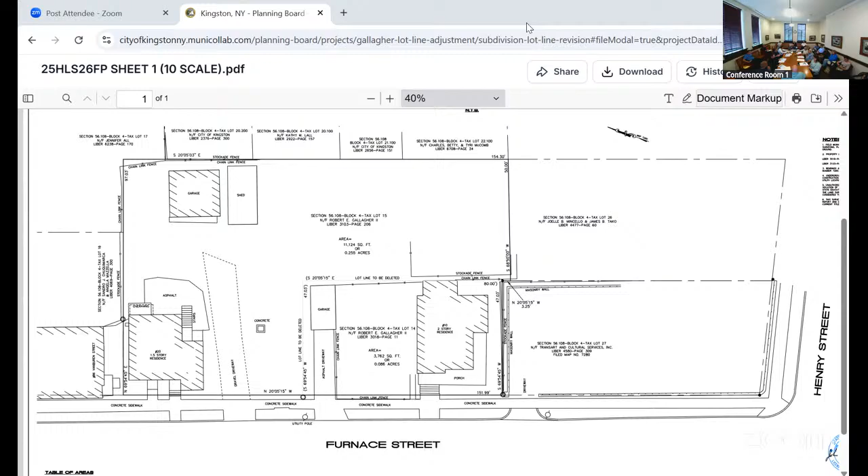All right, I made the motion on that one. Is there a second for that? Second by Vince Archer. All in favor? Aye. Opposed? Carried. All right.

You're out of here. All right, thank you, go run down the stairs. Thank you very much, good seeing you. It all worked out today. All right, for no reasons. Take care, Bob. Thank you.

Okay, item number 3 is 560 Albany Avenue, special permit renewal for operation of a light manufacturing welding business, section block and lot is 48.74-1-5.200, transect zone T4N-O, SEQRA determination, Ward 6. Triangle Fabrication LLC is the applicant, Five Star Realty Holding LLC is the owner. Anybody besides the owner or applicant wishing to speak on item number 3?

Is this just a public hearing for this one? It is, but this is the one that has not met all the conditions of the original approval, so I'd like to ask that the board put this one off until the end and we'll vote, to see if he shows. Okay, you good with that, board? Okay.

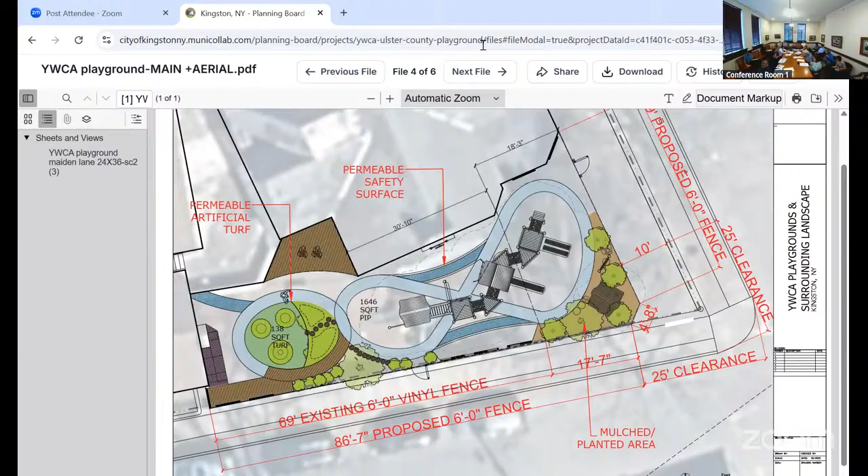Not going from there. 6 or 7? Did I say 6? It says 7 on this one. Yes, this is the one that I printed out. What was it? 6. Just in case you're missing something. I might be missing something. All right, that's 2, 3. But there's no 5 in there. It's on us, we're blaming her. All right. Let's move on. Okay, and the old business, right? Yeah, that's fine, I'll sign this first.

Thank you. Old business is item number 7, draft amendment to planning board approval resolution to address delayed installation of boulevard traffic signal. Section block and lot is 56.40-1-19.310, Transect Zone SD-MF Ward 3, SEQRA determination. Ulster County is the applicant, Golden Hill HDFC as nominee is the owner.

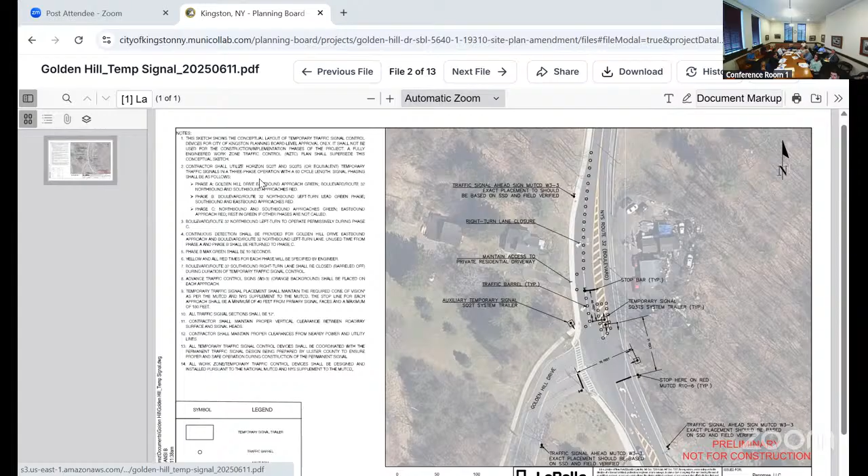There's a draft of a resolution in each of your folders that we will get to. Kyla is putting it up - you have a copy in your staff notes, but Kyla's going to put it on the screen. After last month's discussion, the applicants went back to LaBella Associates, and they provided this design layout for temporary traffic signals and other associated improvements, signage, and some lining that would also be installed. John Schultes reviewed this and they essentially agreed to this layout. He did have a couple of comments after his review. One is to simply remove the statement that it's a preliminary design off the plan before it becomes final.

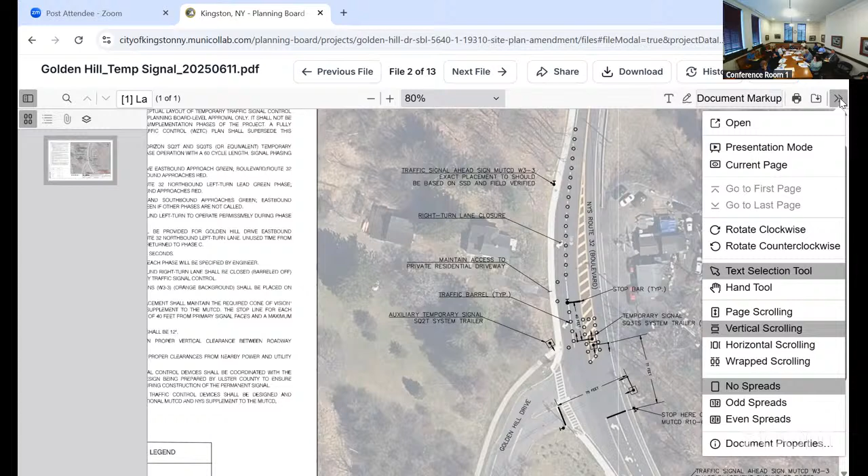And then his other major concern was how the operation and maintenance of these temporary signals will be achieved on a 24/7 basis. So we forwarded those comments along to both Dennis and Will, who are here tonight. I don't know if the board has any questions about how these will work.

Dennis, I know you and I had that discussion, and Will too. So you might want to just talk through how temporary signals will work as construction takes place, and then we can talk about timing later. So I'm going to turn it over to you guys.

So last time we came with, I would say, just a much more preliminary plan based on the vendor itself who was going to put these in place. Since then we got some feedback, and it took some time to forward this to our engineering team and have the traffic engineer put together a real conceptual design, which we were able to put in front of the city engineer for his feedback.

This is still a very conceptual plan that will be finalized into construction plans that the actual vendor itself will utilize to mobilize their equipment. And I've been assured that we will have 24/7 coverage.

These signals can be monitored and adjusted remotely. If there's an issue in the middle of the night and it needs adjusting quickly, they get those notifications immediately, and I can provide some explanation of exactly how that works at the meeting if that'd be helpful. They also have the ability to mobilize if an adjustment is needed on site, so we'll make sure those services are available in case there's ever any issue here. Did that answer your question?

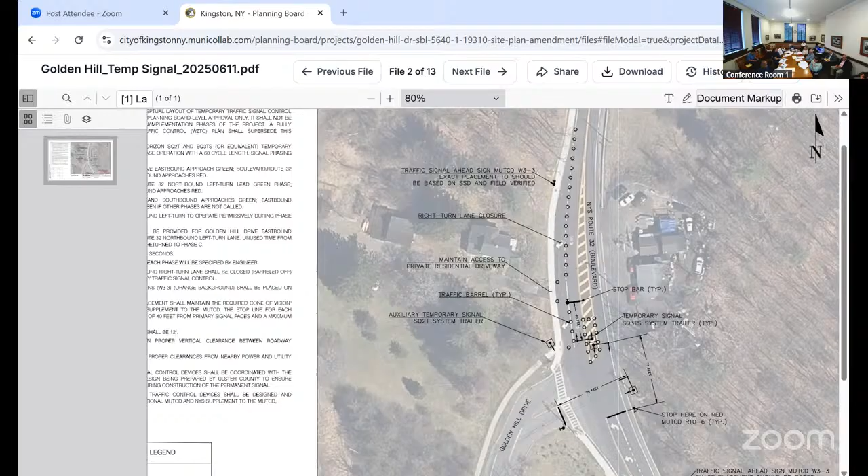And whereas the City of Kingston Planning Board has received several written comments in a petition which speak to the opposition of their request as presented in the communication, with said items being made part of the record by reference. And whereas the planning office has referred the request to the city engineer and building safety division for review and comment.

And whereas the applicants have indicated the units will be available for occupancy prior to the permanent traffic signal becoming fully operational, and desire to begin allowing leasing to start mid-September 2025 at a rate of 30 to 40 units monthly.

Whereas the applicants have proposed the use of temporary traffic signals and associated appurtenances be set in place in lieu of the permanent signal functioning for certificates of occupancy to be issued for any use of buildings. And whereas the board reviewed the proposal in May 2025, requesting that the city engineer be provided with a plan prepared by a traffic engineer to evaluate and determine the feasibility of design and function.

And whereas the applicant engaged Labella Associates PC to prepare a plan dated June 10th, 2025, which was submitted, and the city engineer has reviewed and agreed to the design in terms of equipment placement and associated temporary pavement markings and warning signage, but has requested that there be a designated entity named for 24/7 operation and maintenance.

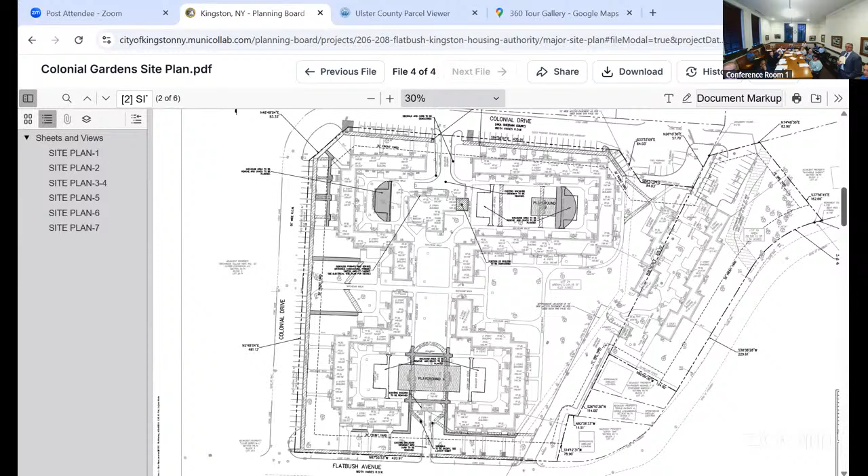Is that generator going to be behind the building, dug in? Is there access to it? Because we weren't sure. Yes, so this generator is going to be diesel, and it won't be maintained very often. The access will be: the diesel truck will come, park in the parking lot to the north, run the hose up, and walk right up to the pad. The pad will be slightly dug in, so the backside wall will be a cut wall, and there will be a little retaining wall on the front to level off the pad. We also avoid the gas easement with everything there.

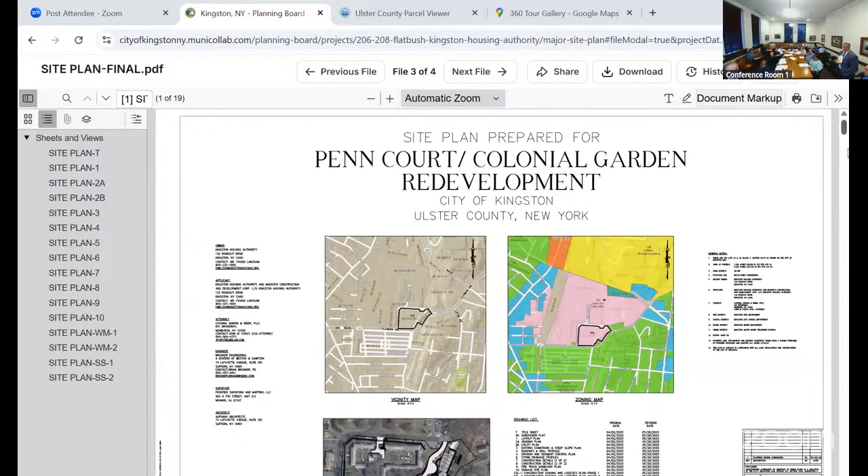If we can zoom in on this area over there - yes, right over here. This is just showing the generator pad for now. Once the generator size is determined, the pad will shrink in size if anything. We just showed the largest size now.

Is it a self-contained generator with soundproofing since it's inside a building, basically? Yes. So this wall here will be our cut wall. If you're standing on the pad looking this way, you will see the wall. Looking the other way, it'll be like looking off a bit of an edge. So we'll have the wall with a fence on top, as shown here, just to enclose it.

The parking for the diesel truck would be right in this parking lot up here, and they could run the hose right up.

Any more questions? Like I said, something new that was submitted was the parking supply and demand reduction strategy.

Are you putting a bus stop in this project at Penn Court at all, or do you anticipate one? I don't think a bus stop - I think we have a bus area where they can come in and turn around.

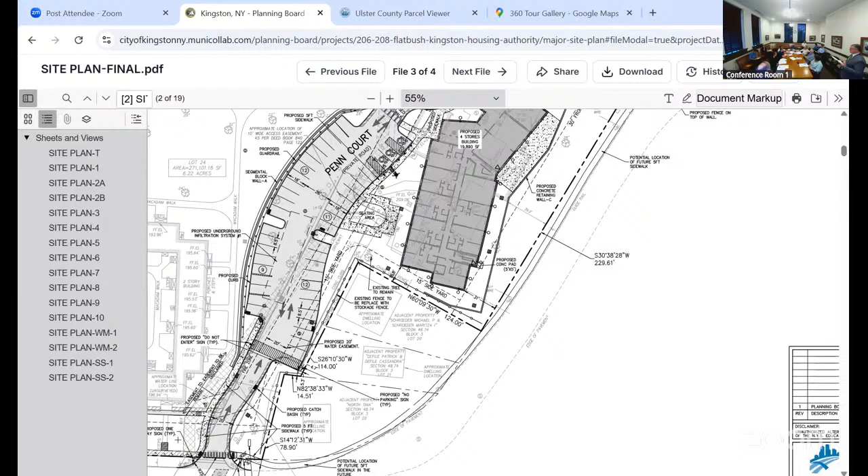How about the 9th at 5, Wednesday? Oh, you took that up? Huh, I can't do that. Okay. Chuck, what about the 9th? I know you said the 7th was good for you.

You said July 10th was there. Let me just double check the room. You do either? Okay, Vince, you're good? I think so. Sage? Either is fine. Okay, probably. You have the 10th on. Emails of the 10th, not. Thanks, Billy, no, that makes a difference.

Okay, so which dates are we looking at? The email from Carlos is mostly the 10th—I'm positive it was a Wednesday though. Oh okay, the 9th. Yes. Well, we'll come on Monday and we'll just sleep over, we'll just camp out until you guys.

So conference room 1 is available. Yes, the 9th, not the 10th. Okay, at 5 o'clock. The 9th at 5. Yes, we would have 5, there's a meeting at 6:30—finance and audit needs to, so we need to be out by 6:30. Yes, stay for the finance and audit committee meeting.

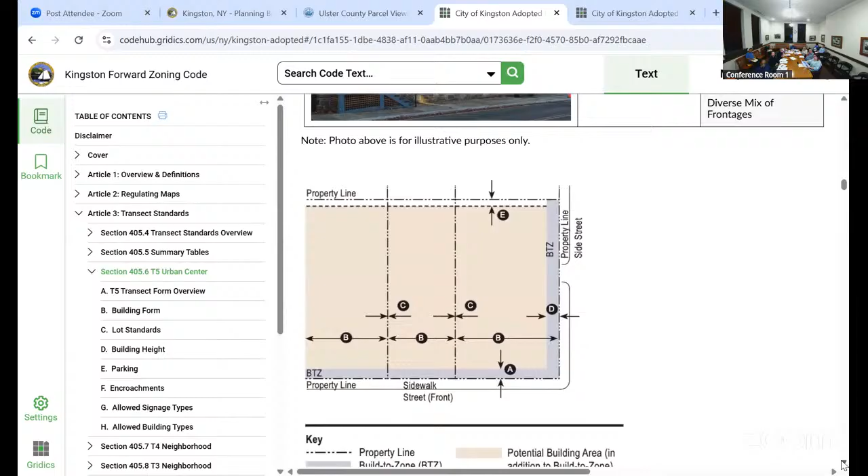So we're talking about the difference between T5N and T5MS. So we want to go to the T5MS - we're going to 90% frontage, 25,000 square foot footprint, so that's the big one.

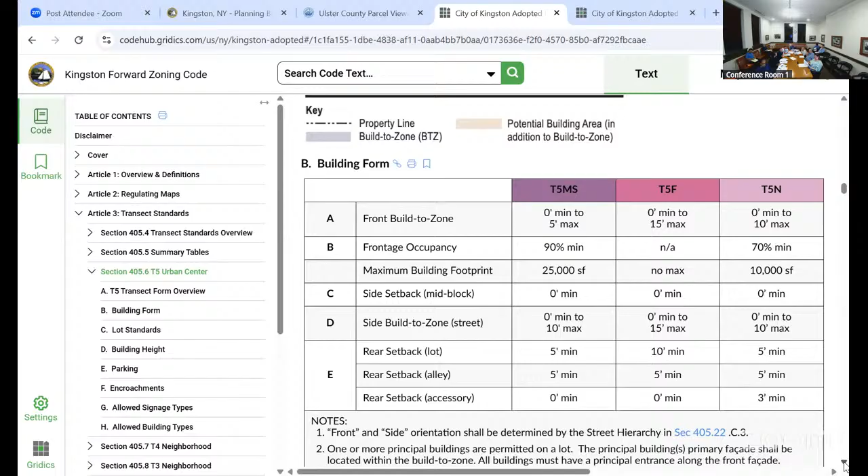When you're looking at some of those larger lots, the 25,000 footprint is reasonable. And building height is what, for the substation? I'm sorry, what's the reason for rezoning? I thought maybe they'll subdivide out that big parcel.

I don't know, possibly 640. That's going to be there anytime soon? Yes. Sometimes if you get one parcel on that side of the street rezoned, like let's say the old dry cleaner, other owners probably want to do something too, so they tack on. So the building height is a big difference there that you see.

So there's potential for 6 stories, 4 max with a 2-story bonus height. Right now it's 3.5 max with a 2-story bonus.

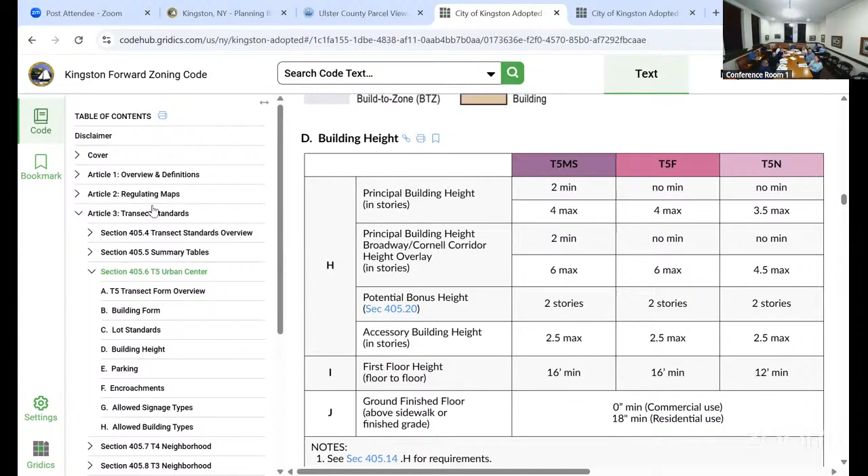What are the uses? I think the uses are pretty close, pretty similar. Are any of those buildings the 2-story minimum? No, they're all single story. It's Main Street, T5MS is all. But this is saying Broadway, two-story minimum. Right, two-story minimum.

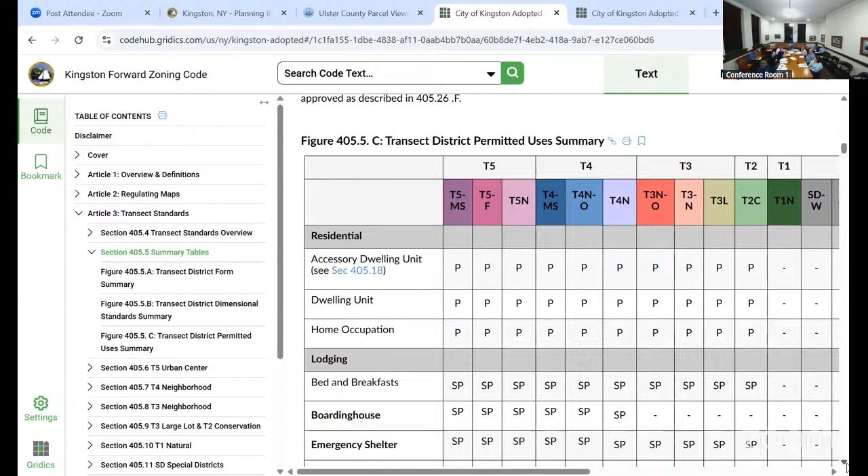Kingston, we're switching. So there are your uses right here. T5MS is the first one and the T5N is right there. So you can kind of see they're pretty much compatible, identical.

I mean, nice, what is that, 3 stories there, it's gonna be up. I personally don't see any issue with the heights because you have North Front Street that's so high in the back. I just thought it was weird that every building is only a 2-story minimum. Well, you also have the Kingstonian that got approved, and that's got high heights, so this will probably bring the rest of it into conformity. I don't see any problem.

I think they'll probably do parking, and then they'll do some type of development. So the ground floor would probably be commercial, or parking behind it, with walkable frontage behind, which is what they're really looking for. Is it required? They require a street front, it's Main Street basically, so yeah.

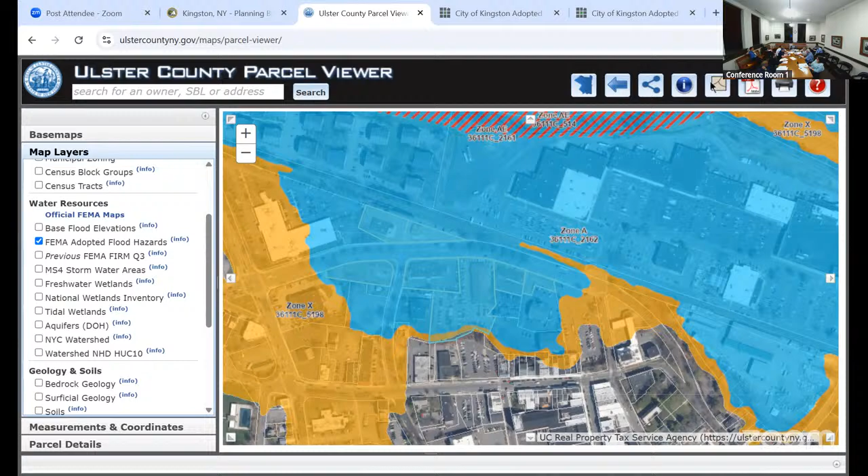the request to rezone the parcels that are outlined in section 1, from T5N to T5MS. Donald Jacobson with a second. Any discussion? All in favor? Aye. Opposed? Carried.

We have one more thing. So the common council is working on a SEQR review for Kingston Point Beach for flood mitigation and sea level practices. It's to implement the multi-tier various terraces that they're doing. So they're seeking designation as the lead agency on the SEQR review of that project.

Council, you would be involved in terms of any LWRP review, because you are now the consistency report, that's why you're in here. It's Kingston Point Beach, and there was a design scheme to do improvements at the beach areas.